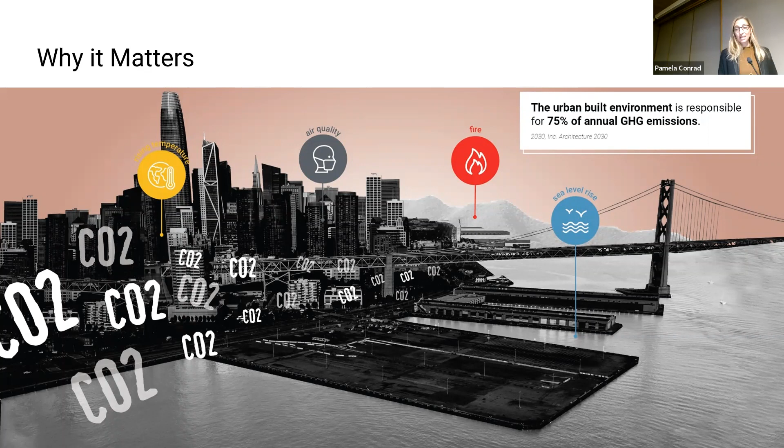And that's a lot. About 40% of those emissions are coming from buildings, but the other 36% are coming from outside of buildings, in the spaces that landscape architects, civil engineers, and planners create—the area I've been focusing on. There are a couple different factors in how we understand those emissions.

It's coming from the embodied carbon emissions from the materials we use in our projects—the extraction, the manufacturing, the transportation, the construction of those materials on site. It's also the operational carbon emissions, such as using gas-powered equipment to manage landscapes, or using chemical fertilizers that can contain greenhouse gases, happening over time in the lifespan of a project.

And then what's really unique about the exterior built environment is that it includes landscapes, trees, plants, and soils that can actually sequester, or take down, carbon dioxide—the largest greenhouse gas—from the atmosphere and sink it into the ground where it belongs. Understanding that picture, we can start to ask ourselves: how do we reduce those emissions?

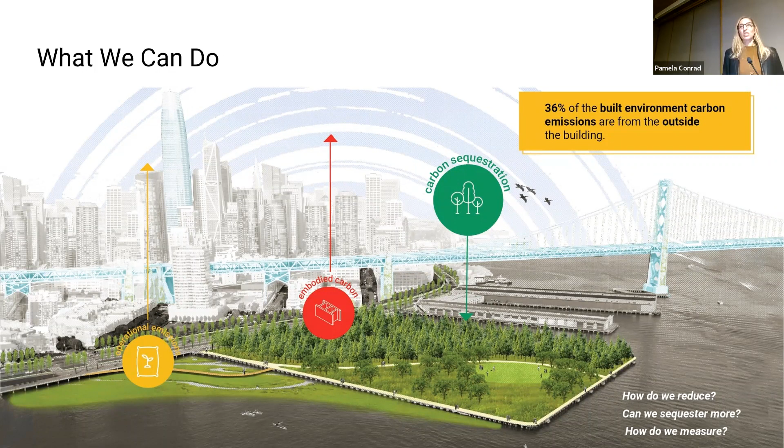Can we sequester more, and how are we going to measure this? Through the natural process of photosynthesis, trees and plants can take carbon dioxide into their leaves and woody material, and convert that as it's where they draw their energy, and sink it into the soil below. That locks it down into that overall, over time, fossil carbon - that's oil, natural gas, and coal that we are continuously digging up and burning.

So now you have that carbon that's mixing with oxygen in the atmosphere, creates CO2, and that's this greenhouse gas that's causing this thickened layer in the atmosphere, which is causing global warming.

The issue we're facing right now is we've put so many greenhouse gases into the atmosphere that we're at a point in time where we have about a 340 gigaton budget left of emissions, greenhouse gases, that we can put into the atmosphere before we hit this 1.5 degree temperature threshold, to the point that it starts becoming irreversible. So what we're working towards right now is understanding what this budget is, and what it means is we have to draw down those emissions.

So we need to get to 65% by 2030 - or 50%, I heard from the IPCC on Monday, but 65 would be better - by the year 2030. And then we need to get to zero overall emissions by 2040.

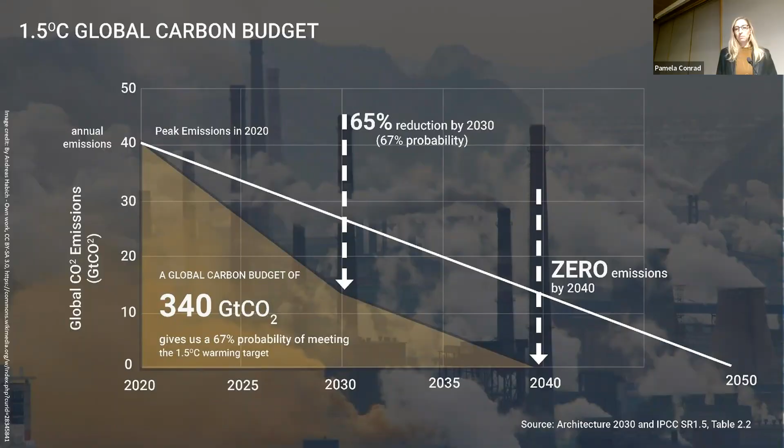And why this temperature threshold matters is because that 0.5 degree increase, from the 1.5 degree increase to the 2 degree increase, can prevent us from having billions of people that will otherwise be exposed to severe heat waves, millions of people that will otherwise be at risk of hunger, and billions of people that will no longer have adequate water or be forced to migrate.

And these impacts will largely fall on those who have contributed the least to climate change, and also on communities of color. So, as I'm sure you've been hearing, climate change is not just a crisis - there's an opportunity for us to step up into this crisis that we're facing.

Now, we've known for a long time that there are some general strategies we can think about for how we reduce these carbon footprints in the spaces we design collectively. So there are ways to reduce those carbon footprints, like designing cities to be more walkable and more bikeable.

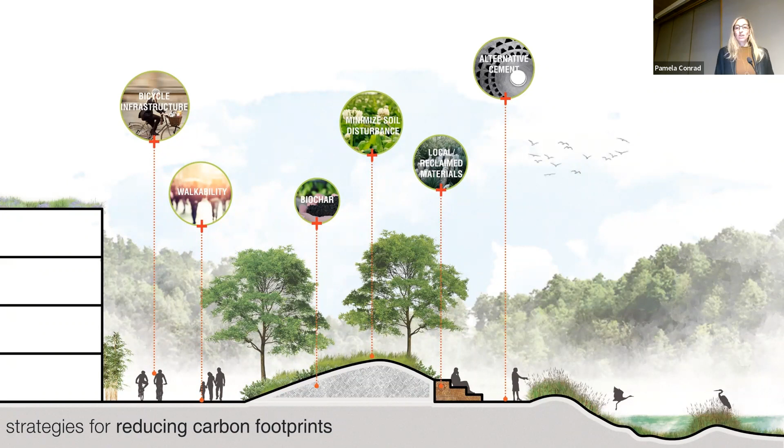We can reduce the emissions that come from making concrete by using cement substitutions. We can also minimize soil disturbance and use local and reclaimed materials. And we can also make everything greener.

So we can use materials and plants that sequester more carbon, like bamboo or shrubs instead of lawn areas. We can add green roofs and generally as much green as possible wherever we can, and then protect and restore our natural ecosystems like forests, mangroves, coastal wetlands, and seagrasses.

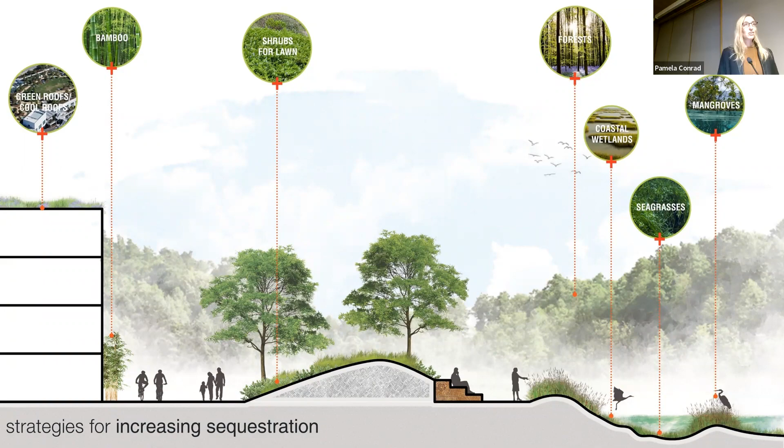So going back to the question I had a minute ago about how do we understand these impacts, or how are we going to measure them - about 5 years ago, as a landscape architect working at my desk on this couple-acre park project, I thought, well, what is the carbon footprint of this project? I think it's really sustainable, where we have sustainability principles in mind in everything we do. I can't imagine how it could be any better for the environment.

But when I started to ask that question, I thought it would be something I would probably just go online and find a tool that afternoon, answer my question, then I would be done and move on from things. But the reality is, 5 years ago, that tool didn't exist.

So just out of frustration and a bit of Missouri farm girl stubbornness, I started to build a tool that could help me understand this sort of building equation side - the emissions - but also the landscape side, this ongoing positive impact that we have.

But when I started to have those numbers in front of me and I could see where those emissions were coming from, I realized that I could have made smarter changes in the materials that I used and how I designed that site, while still allowing the programming to function and the quality to still be good. Instead of it taking 15 years to offset its carbon footprint, it could have been done in 5.

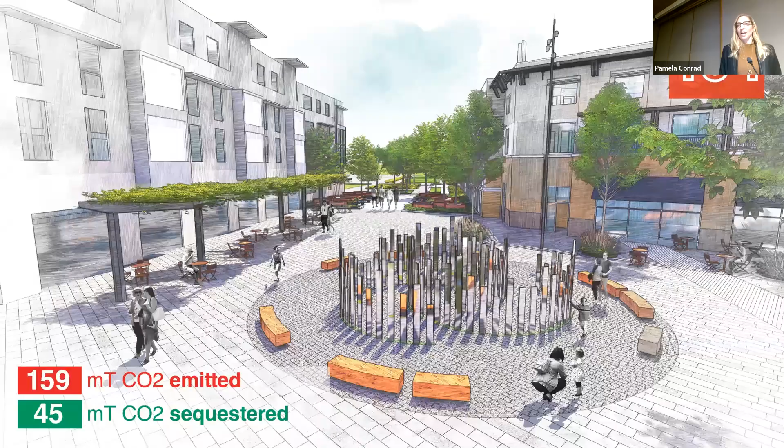I started doing case study after case study. Well, what about different kinds of projects? And what I was really shocked to find is this little half-acre plaza would take almost 200 years to offset its carbon footprint. And again, this was designed with sustainability principles in mind.

But what happened again and time again is that instead of taking 200 years to offset its carbon footprint, it could have been done in 20. And again, just by using some different materials, adding some trees, using more planting instead of paving, and cement substitutions.

And again, the project performs the exact same way it did before. It has the same quality, the same aesthetics, but much better carbon footprint. And so this was eye-opening to me.

But I realized it's not going to make a difference if just I change the way I design, or maybe just my firm changes the way it designs. We need to change our whole business-as-usual as an entire profession around the world.

Instead of being a net emitter, we could be net positive and take almost a gigaton of CO2 out of the atmosphere in the coming decades.

And we could be part of not just offsetting our carbon footprints and offsetting our negative impacts, we could be part of a positive solution.

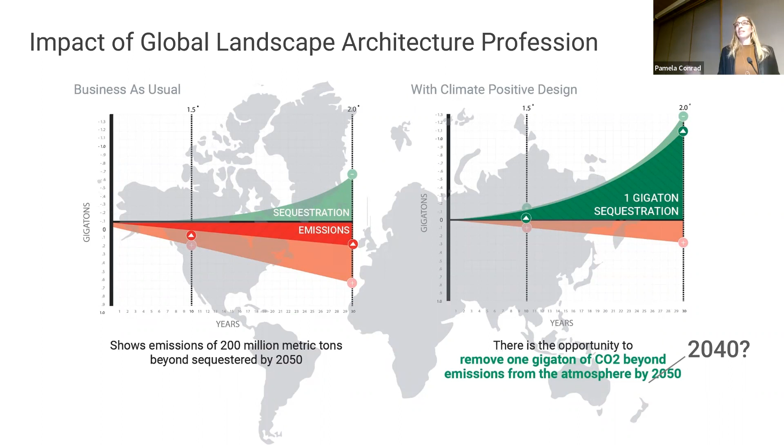And so this is why this matters. With this information, I realized that we all need some guidance in this area.

And so I launched the Climate Positive Design Challenge in 2019 with the idea of setting targets for everybody to meet for their projects to offset their own carbon footprints, with the goal of getting to net positive, not just carbon neutral. That's not really an ambitious goal for us, just offsetting our bad impacts.

It's actually a much better goal to be positive and be part of the solutions. So the challenge sets targets for projects to offset the years that it would take to offset their project, so they can get to that point of being positive.

So it's set for 5 years for projects that are greener inherently—gardens, parks, campuses, hospitality—and 20 years for projects that are more urban, like plazas and streetscapes, for example.

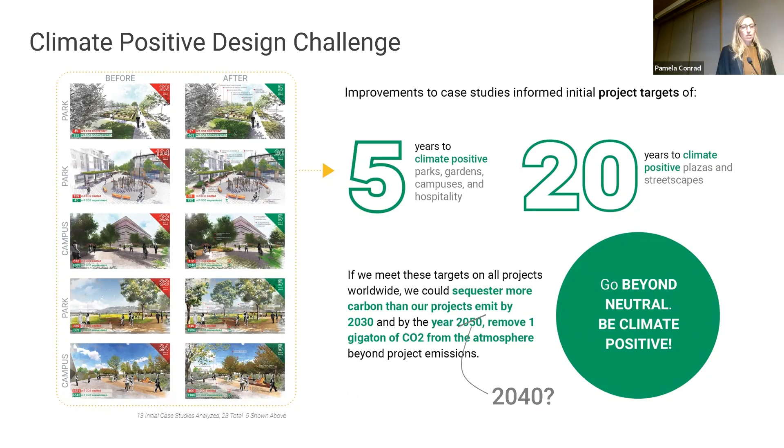And the goal is, if we're meeting those targets, you're basically cutting your emissions in about half, doubling sequestration. And so it's that collective impact that could have this overall positive impact on the planet.

And to meet the goals of the challenge, at the time, it was through the Landscape Architecture Foundation Fellowship, I was able to get some support to help develop this app called the Pathfinder. And it's grounded in a few different principles.

Through this fellowship process, I had the great opportunity to have some really kind and supportive fellows working with me. And I asked them, well, what would it take for you to change the way you design? And they told me 3 things.

They said, one, it would have to be easy and quick. Two, it'd have to work within my existing work stream of how I design. And three, I'd have to see that the changes I was making were making a difference, so I needed some sort of feedback. That's how we developed the app.

The baseline data for materials comes from the Athena Impact Estimator, and most of the sequestration data comes from the US Forest Service. So it's really simple.

I'm going to walk you through it, but basically you provide some quantities for your materials and projects, also planting quantities, and then your plans for operation over time. It's always giving you this years-to-positive score—how much time does it take to offset those impacts we've had.

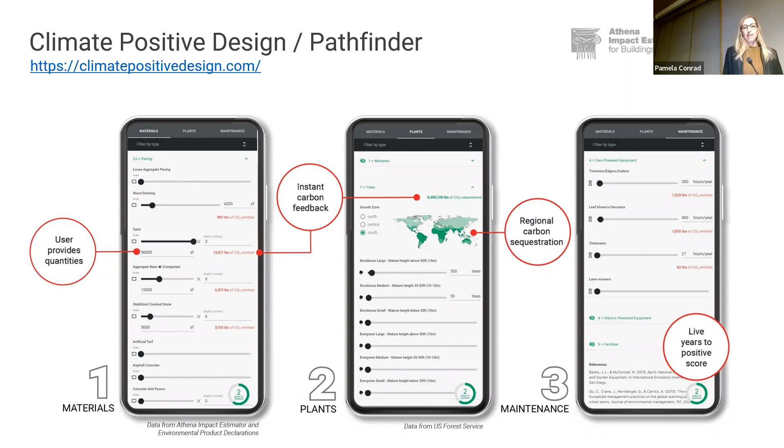I'm just going to walk you through this quickly. When you get to the website, go to the Calculate tab and click Use Pathfinder. It gives you a little demo to explain what we mean by being climate positive.

The two main factors are the carbon we're emitting and the carbon we're sequestering. The more we emit, the more time it takes to offset that carbon footprint, and the more we sequester, the less time it takes. So your goal is to ultimately do both to meet the goals of the challenge.

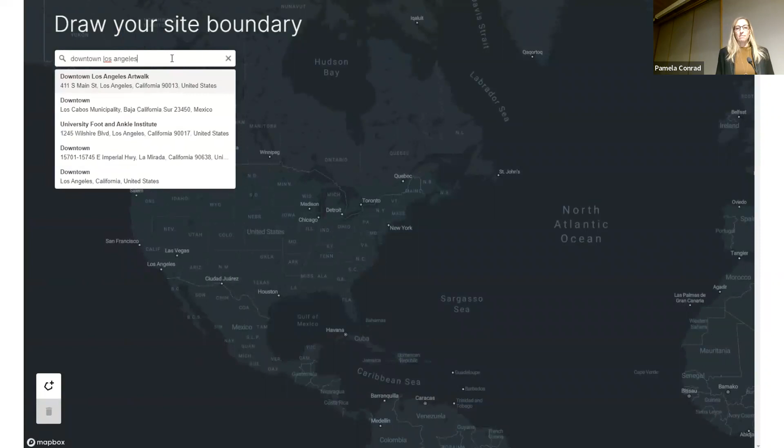When you're working on a project, you can type in the address of your project site anywhere in the world, and it takes you to that site with a rough map. You can modify this later—it doesn't have to be perfect. You're just defining your general site boundaries.

So once you get in there—we're going to downtown Los Angeles today—you use the polygon tool to draw the outline of your site boundary. You just click using the tool as shown, and once you get that, you can always make it more accurate later. You can just check the box to go forward.

Once you continue, all you need is an email address to set up an account to measure your project. You want to get in there and give some basic parameters of your site. Anything you enter at this beginning stage you can edit later, so no worries what you put in—you can say 'this is my mom's house' or whatever, and fix it later.

You want to select your project type and its estimated completion date. Then your units, the phase your project is in, and if you're pursuing any certifications. If you're a student, click the box at the bottom, since that excludes your project from our overall professional contributions. Once in here, you can capture existing conditions of the site or your design alternative.

You can do as many alternatives as you want. So you hit create, and once you get in here, you can search for materials using the dropdown or search. It's pretty straightforward—there are 80 to 100 different materials. You select the one you want to add for your project; you can see it's a range of concrete, asphalt, gravel, the basics, steel and aluminum.

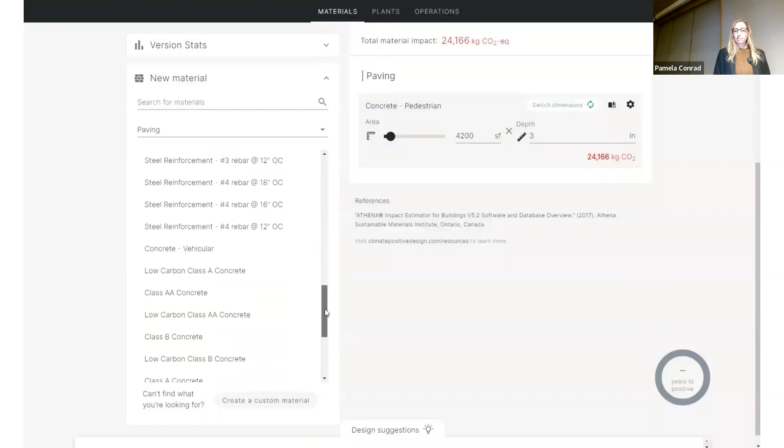How you would add something on your own is you'd get an environmental product declaration and add in the global warming potential number—we can talk more about that as we wrap up, but that's how you'd do it. You continue to add materials, and you can start as early as possible in a project. I recommend even in the concept phase, even if you just have a sketch on a napkin—get some area takeoffs, plug it in, and start to understand what's causing the main offenders, just to get started.

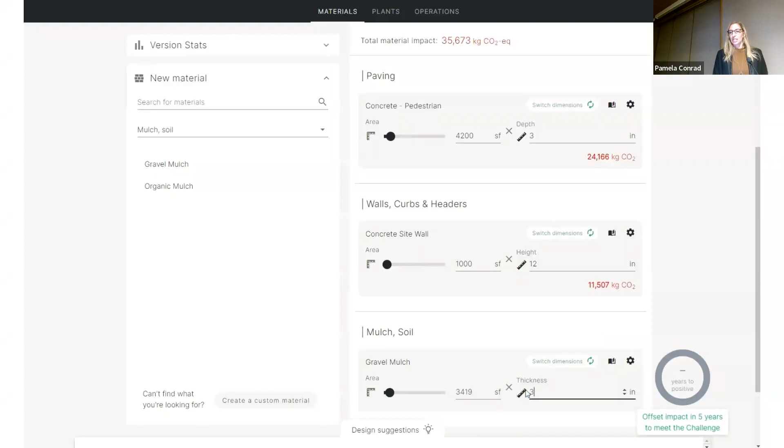So again, you continue plugging away. It gets down into detail things like mulches and soils, and it continues to build up your overall emissions impact. The second tab is the plants tab.

You can see there's a range here from trees, shrubs, lawns, grasses, perennials, wetlands, forests, that kind of stuff. Once you select your quantity, you'll see a couple of things. One, you selected your growth zone because this is regionally specific data. Once you added that medium tree, the green number is the amount those trees are sequestering over a 50-year lifespan. The number on the right, which happens with shrubs too, pops up below, and your years to positive score continues to improve on the lower right-hand corner.

So again, you keep plugging away. As I mentioned, operations would be things like what kind of equipment are you using? Are you cutting down trees? Are you moving or disturbing soil? Again, you just add in the quantities of those things, and that shows you the red number of the emissions.

At the bottom, you'll see there's a design suggestions tab. This is specific to everything you enter, and it gives you recommendations for alternatives to consider that would have a lower carbon footprint. So that's a good place to get started.

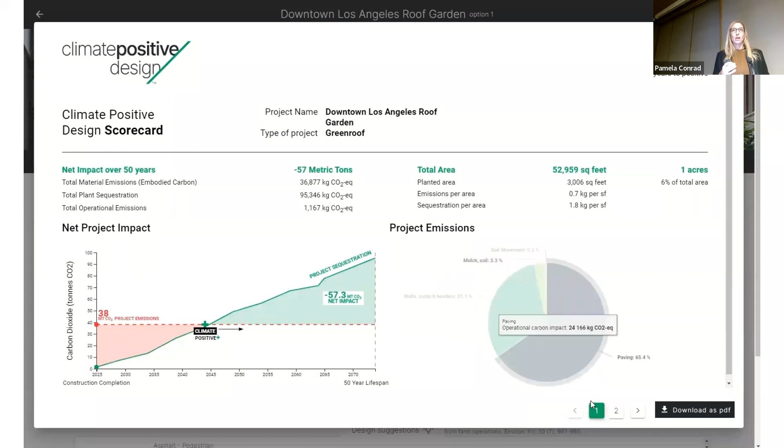You can also go to the version stats and view your scorecard. It shows you, breaks down everything you just entered, so you can compare where the most emissions are coming from. It shows this on the second page of the scorecard, how they stack up and compare to each other.

So you hit the back button and it takes you back to your home page, which again, you can edit any of those things anytime. And if you're doing a studio project or your firm's project, you can enter it all in your one account and see all of your projects. You can learn from each other, maybe your classmates or your workmates, so you can see how are we doing collectively. So that's the tool.

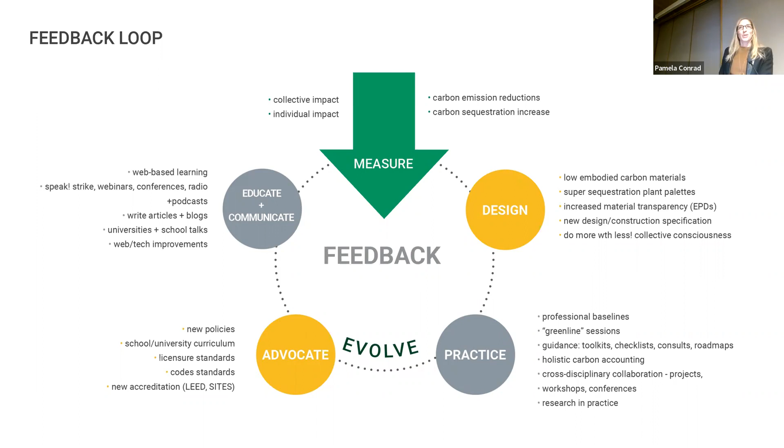So why are we doing this? What does measuring do for us? Well, once we start to measure, it creates a feedback loop. We start to get feedback and understanding the choices for our design. It helps us evolve over time and inform how we design, how we practice, how we advocate, educate, and communicate going forward. And it helps us shift from where I was at that moment in time, just wanting to improve my own project, my individual impact, to everyone doing this and us having a collective impact together.

And of course, I work to wrangle and bring as many people into this initiative as possible. This is only possible with volunteers and dedication from many other passionate individuals, and of course advisory partner organizations that support the initiative over time as well.

It's been about 3 years since I launched this initiative. The great thing is that we can start again by collecting data. We can learn from our progress. How are we doing? What do we need to work more on?

For example, for this first 3 years, thinking about step one, when we weren't aware of this at all 5 years ago, the first step is just increasing awareness, getting people to log their projects, recognizing everybody as contributors, and putting out resources for everybody to use that are free and accessible.

To date, there's about 175 countries reached. That's 90% of the countries around the world that have accessed the website and the web resources, which I encourage you all to do. It's climatepositivedesign.com.

We also have over 5,000 projects logged into the app to date, and that's been great to see. Just even in this past year, that's been an increase of 50% in overall projects, and also a 35% increase in contributors.

Anybody that logs a project is considered a contributor. So that's like gold star, yay, confetti, good job—you're taking the first step in understanding this. And of course, by getting out there and sharing this with others, which all of you can do too, is part of that increasing awareness.

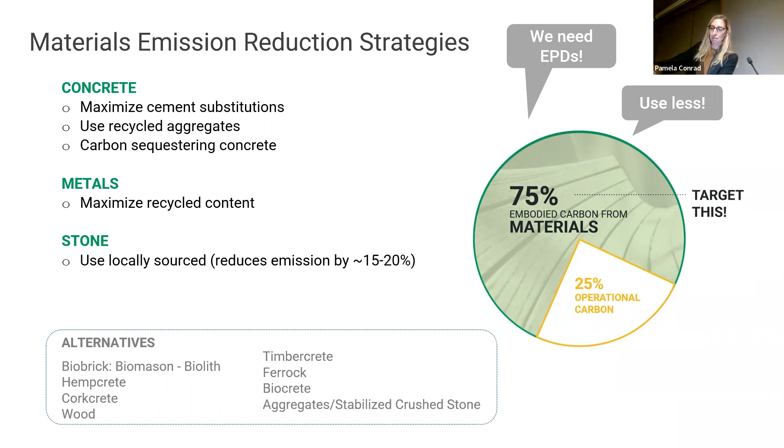Shifting gears a little bit, I think at this point in time, we are starting to understand these principles. We're starting to implement them. And the great thing is when we start them really early, we can really scale up these positive impacts.

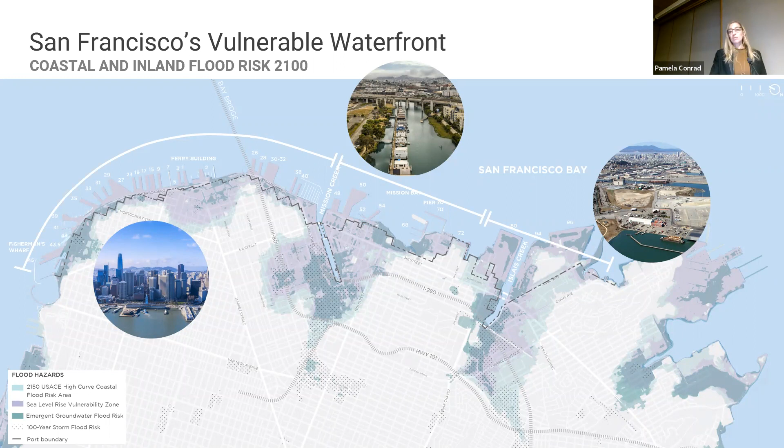And just as I mentioned, the conditions around the waterfront change so much over time, also like Boston's waterfront. Very urban conditions, areas where people are living in houseboats on the water, industrial areas that support port maritime facilities. And the great thing is that through that process of 5 years, and hearing from the community and working with the city agencies, what came about is that people really care about nature and are starting to see the benefits of nature-based solutions.

Not only can we protect from future sea level rise or adapt in a way that's resilient over time, but we can also, using these nature-based solutions, sequester carbon, support biodiversity, and clean the water. There are great examples around the world where nature-based solutions on living shorelines are starting to be implemented, and San Francisco is aspiring to make that the future of their waterfront.

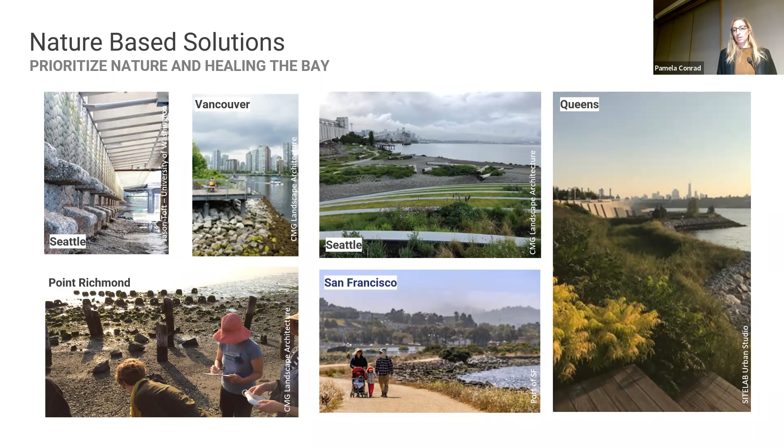I wanted to share a few examples of the strategies developed over the last 5 years. It's wonderful that nature-based solutions are incorporated into many of the options. These are all available on the port's website if you're curious to see more, and they're out for public comment right now.

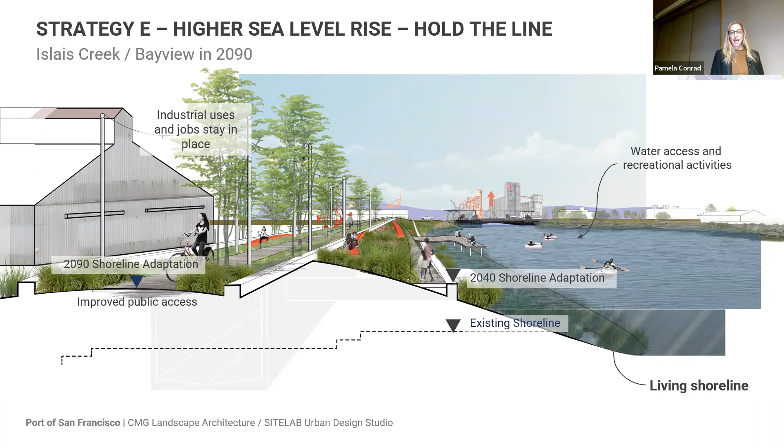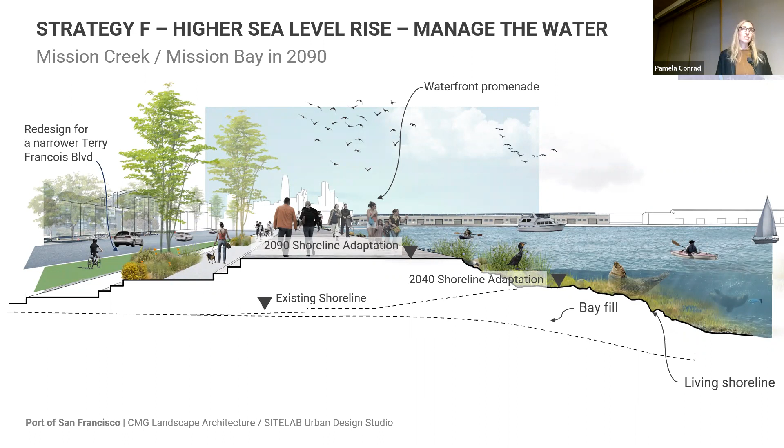Some of the things you can start to see are where nature-based solutions have been incorporated, including vegetation, which over time will support habitat and protect some of the inland uses. We're also looking at areas where we can have a softer edge supporting various habitat conditions, as well as reducing roadway widths to provide more space for gradual adaptation options, versus putting in very structural conditions like seawalls that are concrete intensive with very large amounts of embodied carbon emissions.

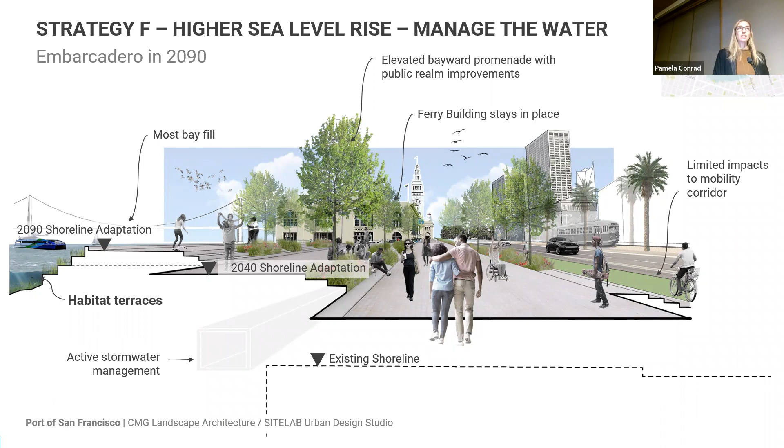As part of this process, we also realized that if we want more gracious living shoreline conditions, we may have to embrace adding some fill to the bay, which does not meet current regulations. So to support a sustainable waterfront edge that sequesters carbon and supports habitat, we might have to work with officials to change policies that will allow bay fill supporting these shoreline conditions.

We're not only looking at opportunities to expand into the bay, which isn't ideal since we'd rather protect existing water bodies, but also at areas where we could pull back the shoreline in ways that might be less impactful. Of course, we have to think about things like environmental justice and make sure we're not negatively impacting communities, so we have to think through all those different aspects of including these nature-based solutions.

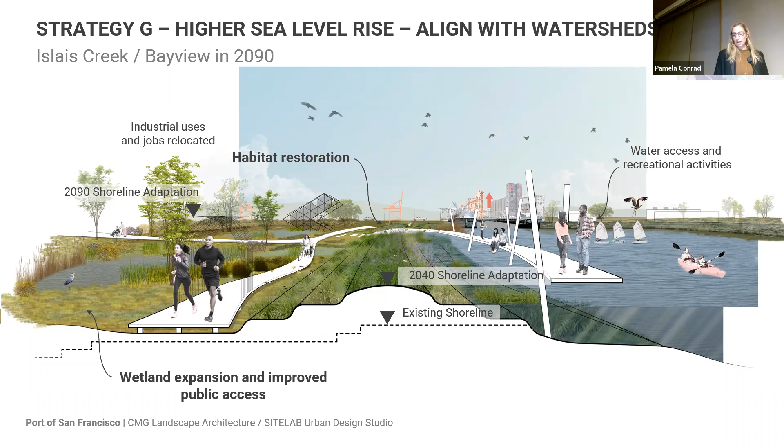We're also thinking about how to address inland flooding conditions from stormwater or groundwater rise, and treating those runoff conditions in ways that support carbon sequestration, habitat, and a healthy bay.

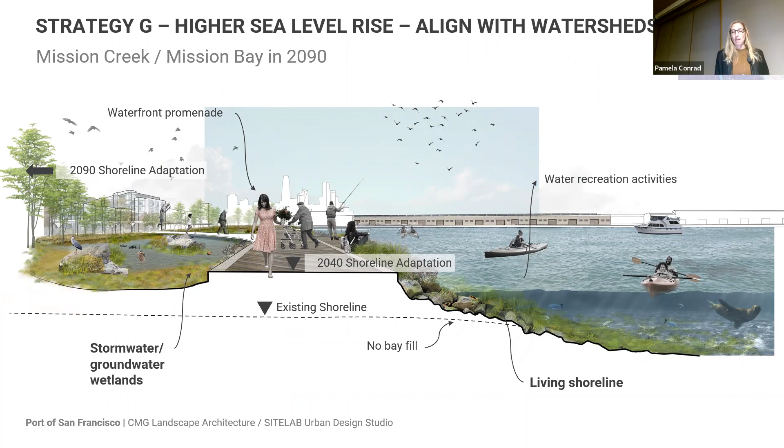Across the water from Treasure Island, we're also looking at different conditions. This is a former naval base site, reimagining a tarmac that looks very different than this image, and considering how it can be a model for climate positive resilient landscapes going forward.

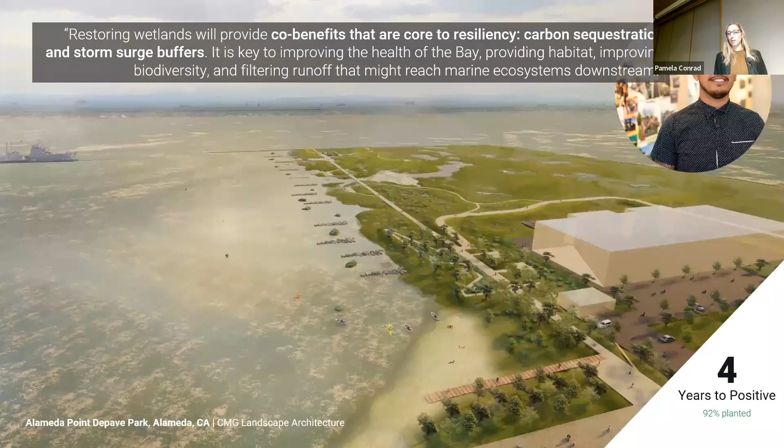Even through the pandemic, we met with local community members to hear about their needs and concerns. This is the site itself, and the primary ideas were to keep everything on the site that exists there today, but reconstruct it in a way that makes more sense given everything we've been thinking about and talking about.

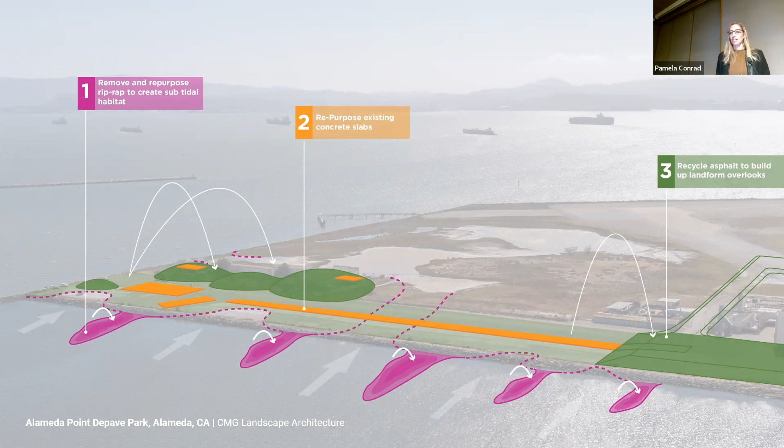This includes removing and repurposing the riprap, creating subtidal habitats with that repurposed material, repurposing the concrete slabs on the existing tarmac, and recycling the asphalt to build up landforms and overlooks.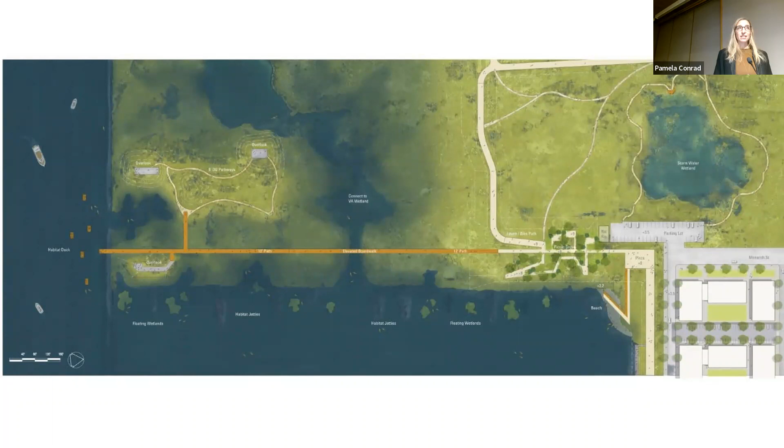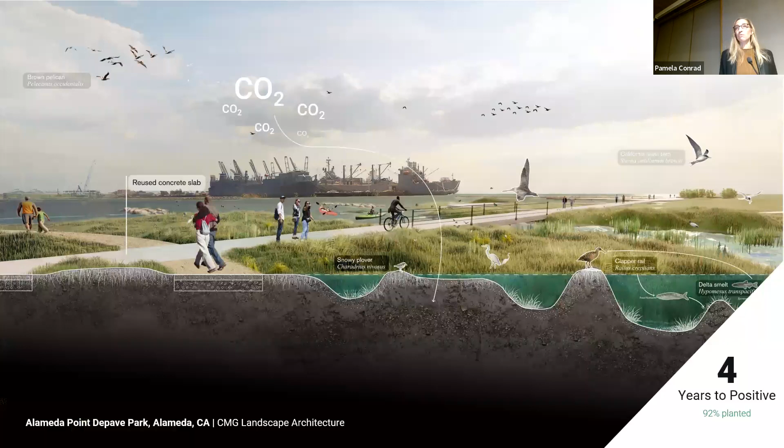The idea is that the site will be one condition when it's implemented in the coming years, and it will also be designed to embrace sea level rise and change over time. The project as it exists today can be transformed into something that sequesters carbon, supports habitat, and offsets its own carbon footprint in 4 years, which is pretty fantastic through the strategies I mentioned. As sea levels continue to rise, the wetland will migrate inland over time and continue to serve its function.

Now, those were local projects I was involved with, but it's also fantastic that this is a global initiative, and it's great to see how other people are using these tools and resources.

This is from a firm in the UK, and they talked about how using the climate positive approach and tool helped them have conversations with their client about changing some of the preconceptions they had about their site. With their goal of getting to 8 years to positive, they were able to have that conversation along the way in the process, and some of those ideas shifted and were embraced by the client and the project team.

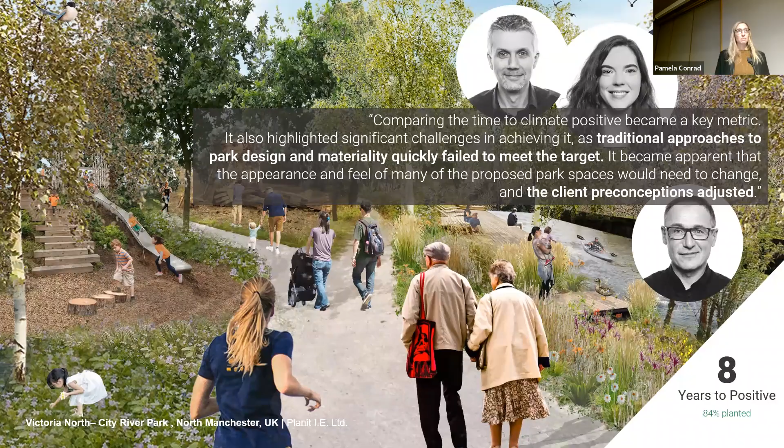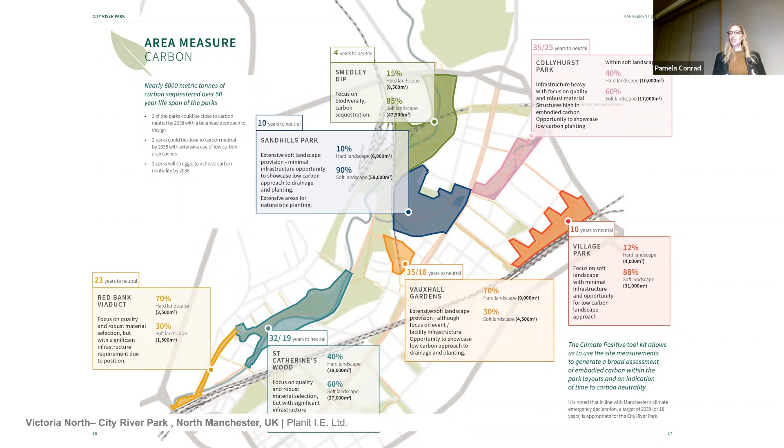They also took those strategies and applied them to an entire regional park network, looking at all the different pieces of the puzzle and how they affected each other and the overall impact they were having. Another project in Spain—wonderful to see these projects actually being implemented on the ground, and seeing that their project offset its carbon footprint in 16 years.

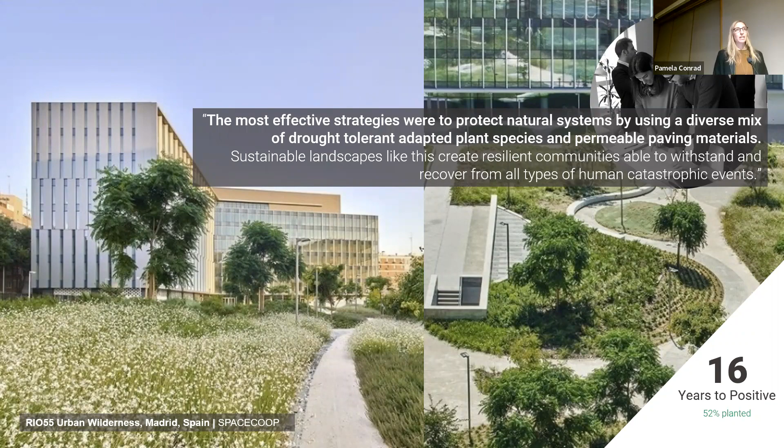It also supported other considerations for resilience, using low water usage plants and preventing other anticipated events that they expect in their region due to climate change. I know that was a lot for everyone to digest, especially if this is a new topic to you, but I think it's helpful to keep in mind.

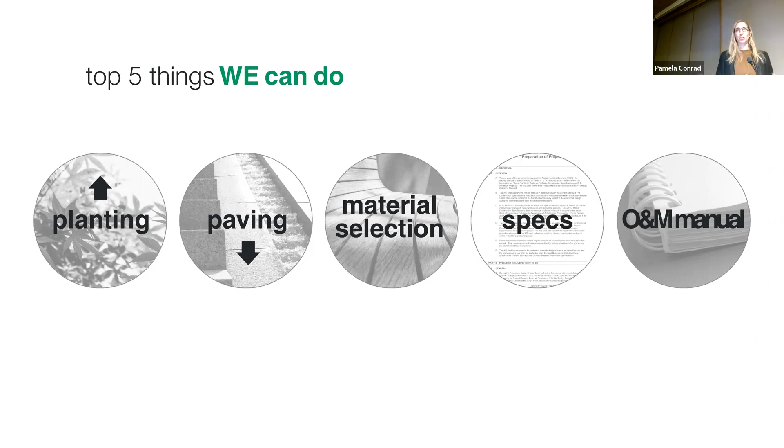There's really five top things we can do when we're trying to reach this goal of being climate positive on our projects. First, we can make sure we're increasing planting—just that one idea of plant more and pave less can get you a long way. We want to maximize the carbon that's stored in the plants and the soil.

Some strategies include using planting that's fast growing, long lived, has a long growing season, and ideally low maintenance, so we're not using a lot of emissions and energy to maintain it.

Also, minimizing paving—minimizing the hardscapes. We've paved paradise at this point in time, so we need to take a step backward and think about how we get back to more natural systems that work and integrate together.

As I mentioned, some of the materials with the most emissions are concrete, metals, and imported stone. We can also think about using more natural grading strategies, so we don't have a lot of piping running underneath our feet that we don't even see—which actually has a lot of emissions when you add it all up.

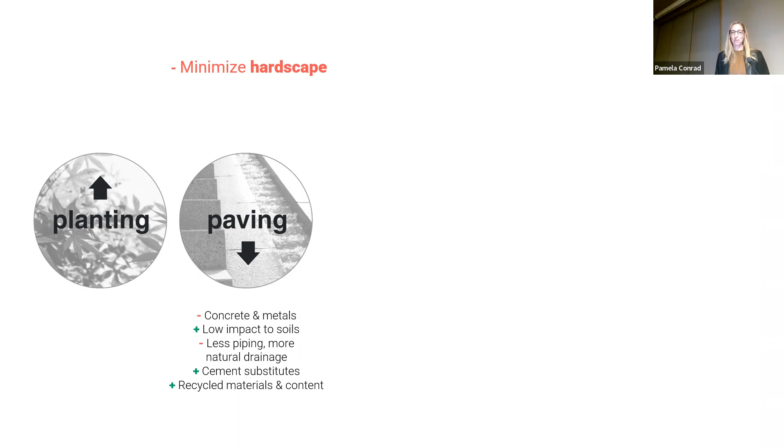I mentioned other strategies like cement substitutions and using recycled materials, and being smart about materials selection. When you start to see all these things and how they compare to each other, it's surprising what a big difference they have in terms of emissions, one material over another.

So looking at those things, thinking about them, using locally sourced materials, and advocating for manufacturer transparency about how much emission goes into making this chair or this panel. It's time for us to start understanding that, but it requires an openness from product manufacturers for us to be able to know that information.

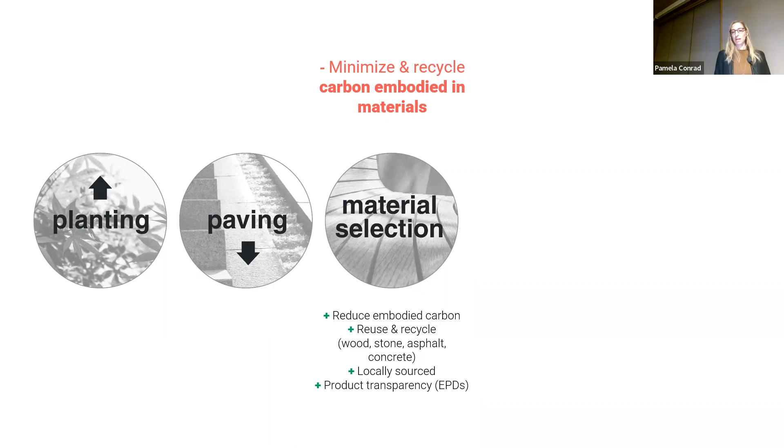It's also important that this is part of our design process and that it makes it into our drawings. It's important that it makes it into our specifications and gets built and implemented the way we intended. One way to do that is making sure your specifications include and address things like what's listed here.

Over time, if you plant a native landscape, for example, you don't want it pruned into a hedge. So you have to write that information into your specifications to make sure the day you walk away, it doesn't happen—getting that into your specs.

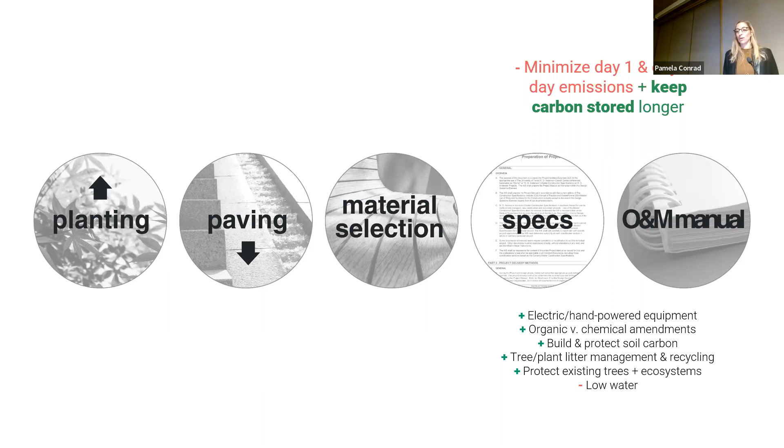Operations and maintenance manuals are another place where you can document that, and you can work with your client and leave them with this manual that gets passed to the maintenance crew. Or even better, work with the maintenance crew to develop it so everybody really understands the intent and is on board with implementing that over time.

Beyond what you can do on projects as designers, there's also so much we can do as advocates. All these things need support from the policy level—support from our cities and municipalities to help make this part of the requirements, guidelines, standards, and codes going forward.

I've been doing what I can to work with agencies and certification systems to help write new LEED and SITES credits, working with the City of Toronto on their new green building standards. As Maria mentioned, I'm a contributing author to the Build Beyond Zero book, where all the things I'm talking about are covered in much more detail—you can probably digest them a little easier that way.

And then the climate action plan effort that I led this past year with the ASLA, you can also download that resource and the field guide and get that online. It's like a 100-page document. You can go through it, keep it on your desk. It's a really great reference. The idea is just getting this out there in as many ways as possible.

And of course, that advocacy goes beyond just a certain discipline, but we have to work interdisciplinary. So some of those efforts are working with the architecture community, supporting some of the initiatives that Maria mentioned at the COP26 communique, really trying to bring people together to advocate for the same things, so we can be much more effective when we're working together with common goals. And then again, aligning the landscape architecture profession as well and commitments.

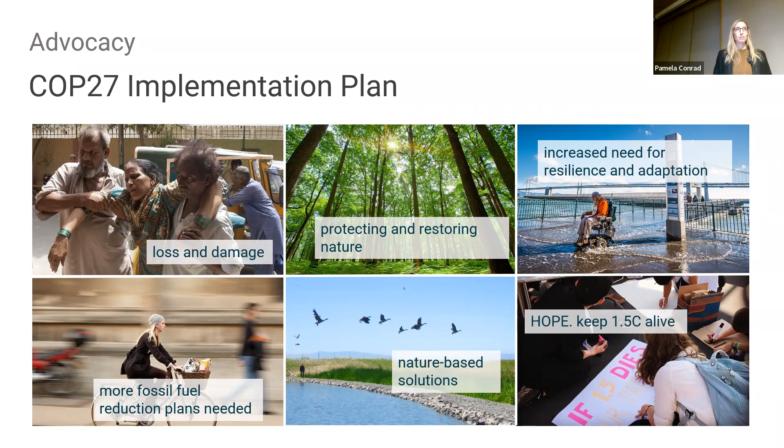And I think there's definitely a groundswell around people wanting to get involved in the advocacy space. So I hope you feel like you have the opportunity to get involved as well, because it's really clear what we need to do. Coming out of COP27, there's a very clear implementation plan. We know all the solutions. We just need to implement them. So we need everybody that's involved in any way to get involved and take action.

So for you, there's lots of different ways that you can get involved. If you're an educator or a student, I hope you feel like you can use the resource climatepositivedesign.com. The Pathfinder tool is there. The challenge is listed out there for you to better understand. There's a whole bunch of case studies, a whole bunch of resources, a toolkit, and I'm working on revamping that. So there's going to be a new one coming out soon, which is kind of like the quick short version that you want to just have on your desk as a reference for the strategies.

But you can also reach out if you want to advocate or volunteer. And then also for anyone that's actually professionals in this space, we can take action through our projects. I think there seems to be sometimes a misconception that people think the only way to take climate action is I have to go out and protest, right? And the reality is you can take action through the things we build, the things we design. That doesn't actually require any policies for you to do that.

You can just make those changes on your own. We don't, when we work with clients, ask about every single decision that's made, right? We make a lot of choices as designers. So that's agency, we can do that. And the more you help to educate yourself to know what these strategies are, the more you're actually taking action through your work. And obviously, the more of us that do that is helping to advance the greater collective good.

But also, if you're a homeowner and you have a backyard, or you're working on a project, you can implement these same strategies at any scale, right? Backyard to the whole world. So keeping that in mind, it all adds up.